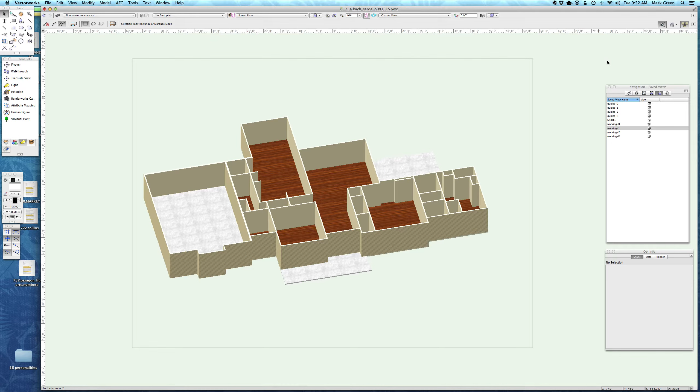So that's what I'm going to show you on this. So this is how we left the last one. We're back to a plan view. I'm going to turn off the guides because you won't need them. So this is a little bit advanced.

We're going to be using that wall replacement tool, and we're basically going to be duplicating the exterior walls of the first floor, moving the duplicated version to the basement level, or the foundation level I should say, and then we're going to replace those exterior walls because they're just made out of 2x4 right now. We're going to replace them with a different thickness of concrete wall.

We're going to have to change the classes too because we don't want to have a concrete wall that's in a siding class. That would be incorrect. So first I'm going to select all of the exterior walls. To do that, I'm going to get this magic wand, this select similar tool. I got to make sure I'm selecting what I want to select here, so I got to click on this, the preferences here. And I'm only dealing with classes right now, so thickness doesn't matter. It's actually set exactly the way I want it.

Because I want to get everything that's in the same class. See, if I left it selected like this, it would be looking for all of the same wall styles. And you remember some of these exterior walls were with the exterior 2x4 wall style, and some were 2x6. So those would be a couple different wall styles. So right now, because it's selected, it's looking for all the same wall style.

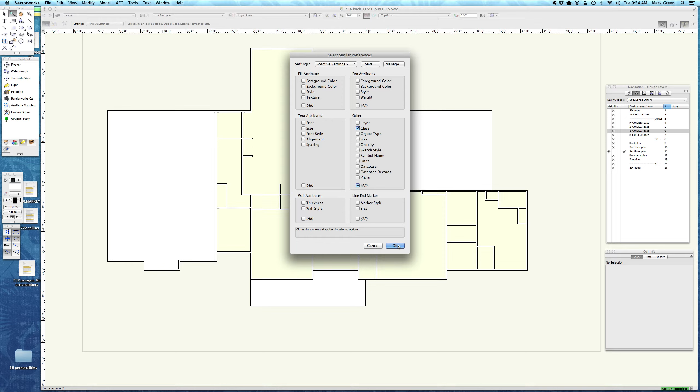The class, they are all in the exterior siding class, so that was correct. So if I turn this off, now it's looking for all, whatever I select with my magic wand select similar tool, it's going to look for everything that's in the exact same class of whatever I touch. So I'm going to just leave it like this. And if I click on this exterior wall, it should give me the entire perimeter of the house, and also include that garage separator wall because all of those walls are in the exterior. I think they're all in the exterior siding class. They are.

So technically, I'm going to deselect those. Technically, this wall shouldn't be exterior siding because it's not really an exterior wall. It's not going to have siding on it. It's between the garage and the house, so it's really an interior wall. So I'm going to change the class on that because it is an interior wall.

Okay, so now I'm going to get that again. I know that the preferences are already set the way I want them. So this should now select just all of the exterior walls, and it does. I do, however, also want to select this wall. I just want to make sure it was in the right class. So I'm going to hit the selection tool. All of those walls are still selected. I'm going to hit the shift key because I want to add this wall to it.

All right, so those are the walls that I want to take downstairs for duplicating. So all these walls are selected. I'm going to hit Command D.

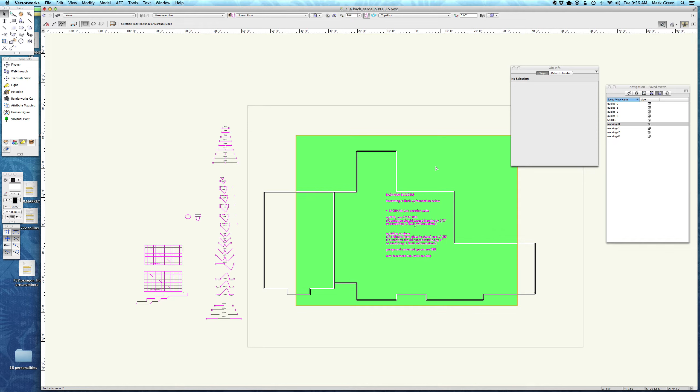This note is important, so I'll just slide it off to the left here. So there's all the duplicated walls. The one thing it does is it screws up all of the connections, all the joins. So we'll change that at the end.

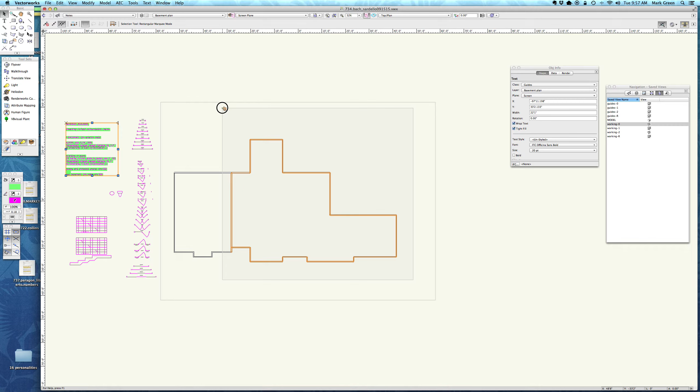Let's see, what I want to do first is we'll deal just with these - these are the walls that will have... So you remember I said that the basement of the house is kind of separate from the garage, the foundation of the garage, because the garage doesn't have a full basement.

So if you were literally standing inside this basement right now, which are the walls that are the perimeter of the basement? Let me draw a thing around them. It's almost all those walls minus this wall right here. So that would be the entire basement of the house.

So I'm going to replace all those walls with a 10-inch concrete wall, and then make sure that they're all in the right class.

Currently, if you look under class, there's nothing showing - it's because there's more than one class. All of these walls are in the exterior siding, and this separator wall is in the interior. Remember, we just changed that to the interior class. So that doesn't matter right now because they're all going to become concrete as soon as we change them.

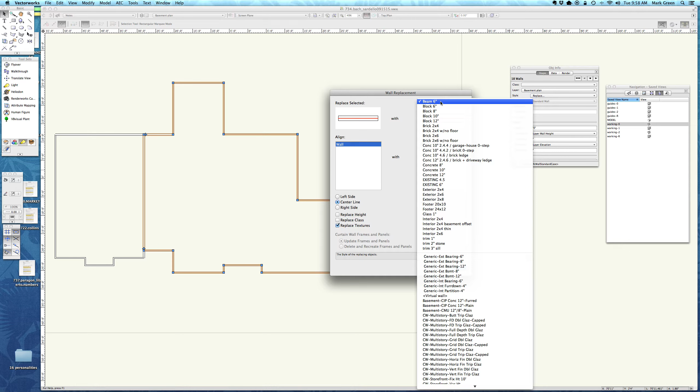So these are all going in a clockwise fashion. We're going to replace the left side of the existing wall with the left side of the new wall. I'm not going block 10 inches, I'm going concrete 10 inches. Align left side with left side. All these walls are going to grow toward the inside of the house because the outside is aligned left with left. So watch the walls as I hit OK.

So they all grew in. I just need to change the class now to wall exterior concrete. Now they're all in the correct position.

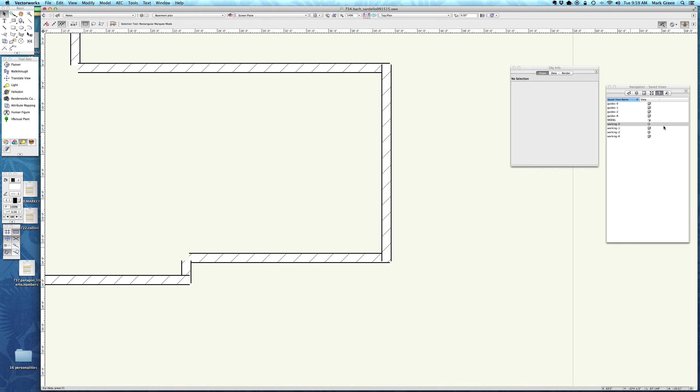So the only other thing about those walls right now is they have to be aligned properly with the ones above. So currently I'm going to zoom into this part of the house and turn off the guides layer - there aren't any guides on, but I'm going to turn those off - and ghost the first floor plan above.

So you can see that the walls are lined out to out all the way around. That's because we aligned those left to left. Hope all that makes sense. So these still aren't joined - we're going to have to join those in a little bit.

But the last thing that I want to show you is that these foundation walls actually need to be bumped out a half inch, because when the builder frames these 2x4 exterior walls, he's going to put a half inch of plywood.

It's actually called OSB, and it's actually not a half inch, it's 7/16, which is very close to a half inch. So he's going to be putting this 7/16 OSB sheathing on the outside of the 2x4 framing, and that sheathing has to be flush with the concrete wall. So that's actually what this note was about over here.

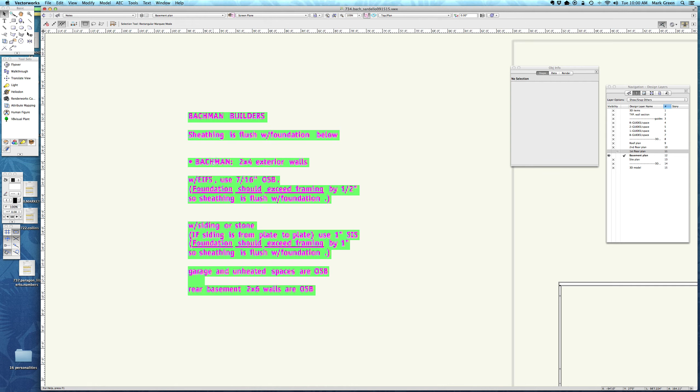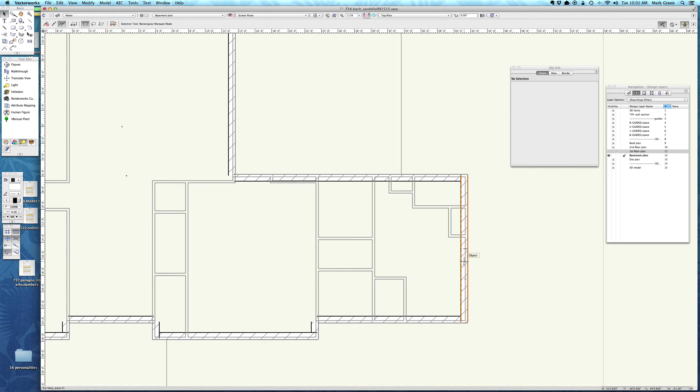So anyway, that's—actually I just told you wrong. There's going to be a 1-inch sheathing. If it's a 2x4 exterior wall, it's going to be 1-inch sheathing. So in order for the sheathing to be flush with the exterior wall, all of these concrete walls have to be bumped out 1 inch.

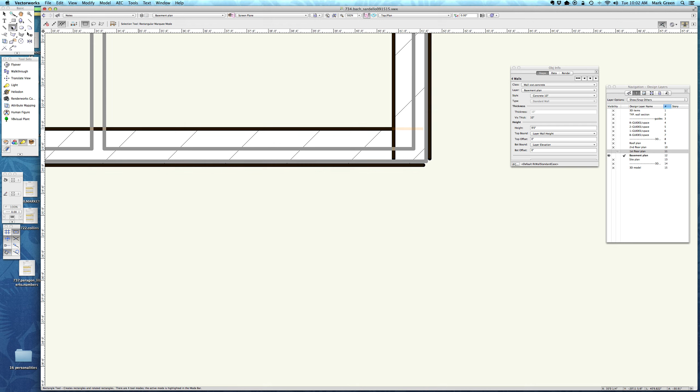So if I select this, this, and this, I can bump all of those walls down 1 inch and over to the right 1 inch, using Command M to get the move selection dialog. Those 1, 2, 3, 4 walls are going to move over 1 inch and down 1 inch. If I zoom in you can see they're outside by 1 inch—let me draw a box here to show you. There's 1 inch. So I basically have to move all the other ones too.

Let's go up here—this one needs to be moved, this one needs to move. I'm selecting these because I can move all these at the same time. I could select this one and move it up 1 inch, then select this one and Command M it over 1 inch, but I'm just going to undo those, because if I move all of these at once, I can, since they're all going either up or over.

So Command M, 1 over, 1 up. This one, this one, this one—move it over, move it up. And then this one, this one, this one—move it over, move it down. And then this one also moves over and down, and these ones move over and down to the right. All right, so they've all basically been moved 1 inch away from the walls above.

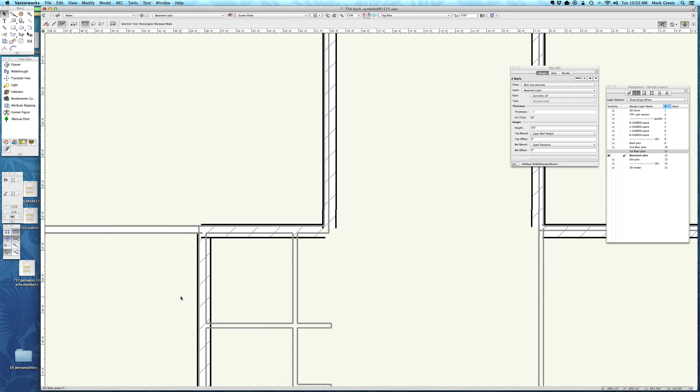Okay, now I'm just going to turn off that ghosting, and I'm going to repair all of those joins. If you click anywhere on the first wall to anywhere on the second wall, it'll join properly. Okay, so those are all joined. I'm going to go ahead and ghost that first floor over top of it again.

And you can see that the basement walls are 1 inch out from the framing above. And again, that's because the framing above is going to have, in this case I said OSB before, but actually it'll be 1 inch of foam, and that foam needs to be flush with the outside of the concrete below.

So now all we've got to do is put a foundation under the garage. And if you recall, these are the garage-only walls. I can select them all holding down the shift key individually like this, or I can just draw a marquee around them all and then hit shift to deselect this one, since I don't want that one.

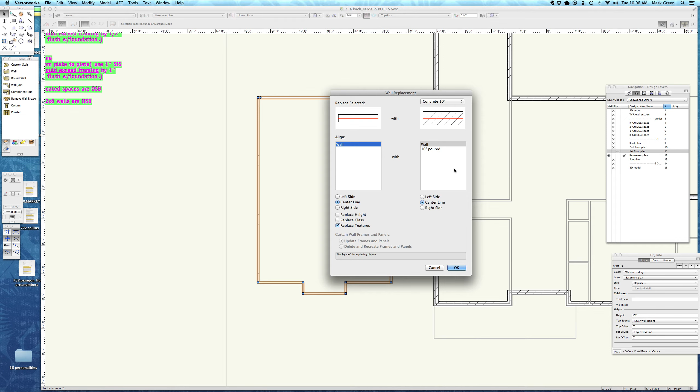All right, I'm going to be doing the same thing with this—aligning the right side of the wall with the right side of the new wall. Initially I'm going to make these all 10-inch concrete, then change the class. Okay, that's the first step. Second step would be to move them all 1 inch.

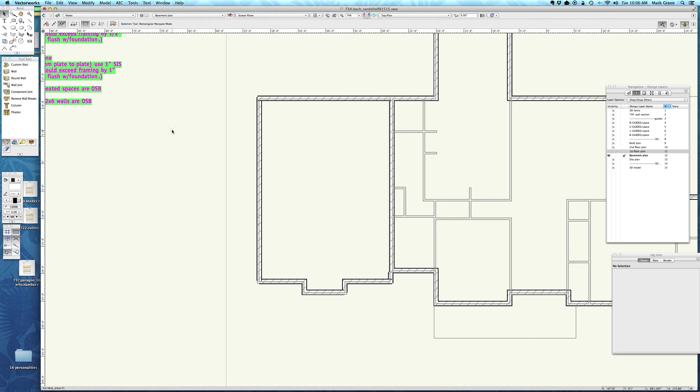Next step would be to join them all properly. Actually, the next step would be this garage—the wall that has the garage doors on. This is the only one that's ever a 12-inch concrete wall, and the extra 2 inches are to support the concrete driveway, so the driveway isn't just resting on dirt, it's resting on part of the house. The extra 2 inches provide a ledge for that concrete to be poured and rest on top of.

So I'm going to replace this 10-inch concrete with a 12-inch concrete wall, but I'm going to align the right side of the existing to the right side of the new, because I want it to grow 2 inches further on this side, on the left side.

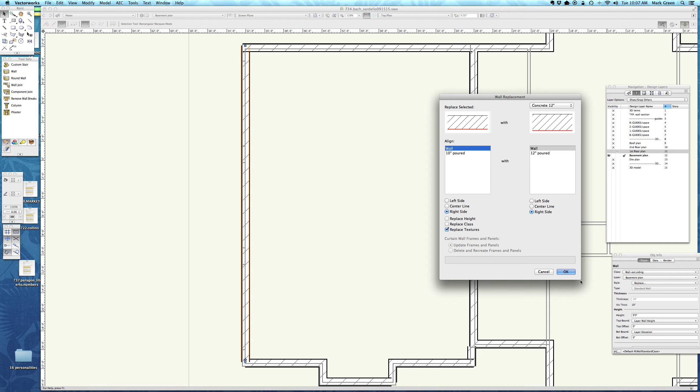So line right side with right side, and that's that. All right, so the only other thing to do would be to align this 10-inch wall with this 10-inch wall.

Just like the concrete has to have that 2-inch ledge to rest on for the concrete driveway to rest on, the inside edge of the garage also has to have a ledge to rest on. Remember we drew the concrete to the inside of the framing? Well, it's resting on all of this extra concrete block. Right here you can see it's got 3.5 inches to rest on, but here it only has 1 inch to rest on.

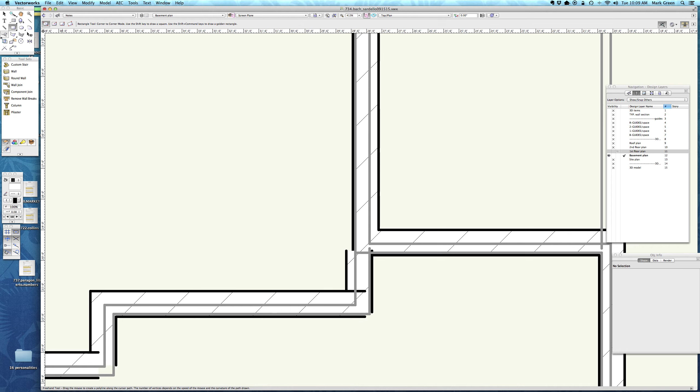Plus, if you were actually putting up forms to build this concrete wall, this would be a real hassle to have this little jog here. So I'm just going to align this wall with this wall, and the difference is it's off by 2.5 inches. I'm literally just going to select this wall, Command M, move it over 2.5 inches, and now they're aligned.

So all we got to do now is turn off the first floor ghosted, and I'm just going to reconnect all these. When I'm connecting these, just remember, just like above when the garage walls were done last, first make sure that this one is connected properly to this, and that this one is connected properly to this one, and then connect the garage walls to it.

And one way you can tell is whether or not they're properly aligned. If you click on this, you can see that ghosted orange goes all the way over to the corner, and the same with that. So they're definitely connected.

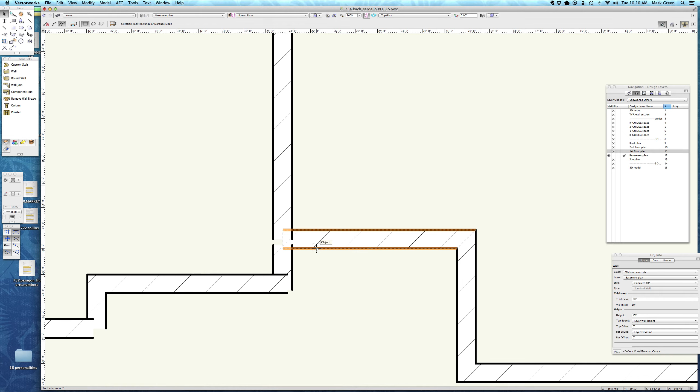I'm going to disconnect them real quick by taking this remove wall breaks. And now if I select, you can see that the ghosted orange only goes halfway. Okay, so I'm going to reconnect those.

I'm going to do these corners of the garage. Those are connected. Connect this to this. Those already are, I can tell. Connect that to that. Connect this to that. All right, those are the garage foundation walls.

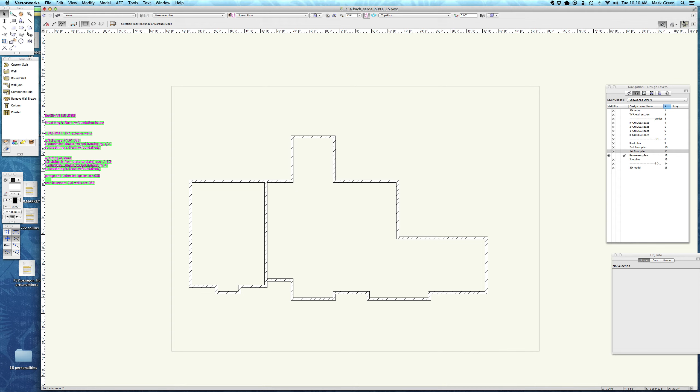Now currently those are all full height, the exact same height. And remember, I said the garage foundation walls are usually only 3 foot high, less than half the height of the main foundation walls. So what I'm going to do is select those walls.

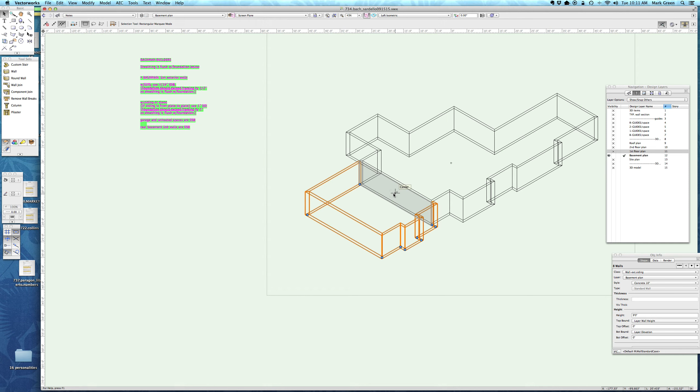Okay, so just these walls are the ones that are going to be shorter. Look at it in front view. If I go down here, the bottom offset, I want those to be 3 foot high. Currently they're 9 feet high. I want them to only be 3 foot high. So I'm going to bring the bottom up 6 feet. And now those are only 3 foot high walls.

So if you look at them like that, I see a mistake there. I didn't change the class on those, so let me reselect those. See, those are all on the wall siding class. I'll put them all on the wall exterior concrete class. Now redo that - now they're in the correct class.

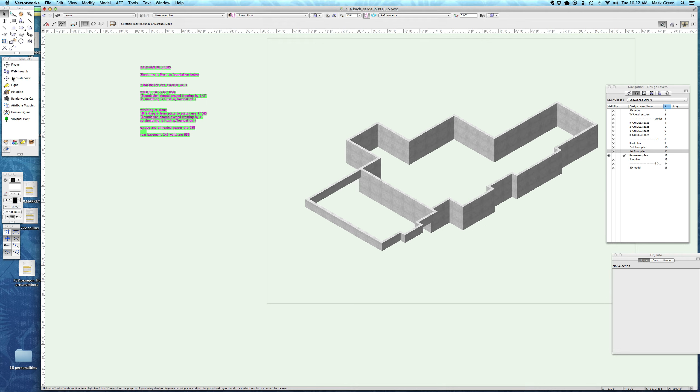So this is what this looks like. Those walls are 3 foot high, and the rest of them are 9 foot tall. So for the foundation, there's one last thing that we need to do.

Underneath all of these walls is going to be a footer, which is basically a wider concrete wall. That wider concrete wall is only 10 inches thick - usually sometimes it's 12 inches, but it's almost always 10 inches thick. It's going to be 10 inches thick, and it's wider. It's a different wall style.

So we're just going to do the same thing. We're going to select all these walls, except for this one - those are all the basement walls. I'm going to Command D to duplicate them, and so now I just have the duplicated walls on top of the other one.

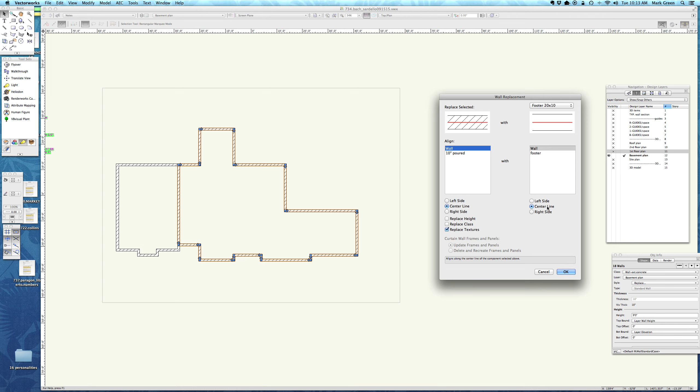So I'm going to change the wall style to a footer - 20 inches wide by 10 inches deep. So footer 20 by 10. I'm going to hit OK. I'm replacing the center line to the center line because I want the foundation wall sitting directly in the center of the footer walls.

Okay, currently it's in the exterior concrete class. I want those to be in the footer class - exterior footers. And I want to send them to back, Command B.

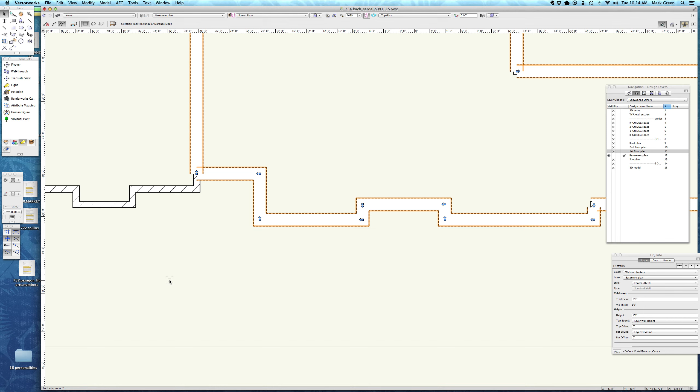Now they look correct, except for the fact that these are all 9 foot high, and they're not supposed to be 9 foot high - they're only supposed to be 10 inches high. And they're supposed to sit underneath. I'll show you a front view - they're supposed to sit underneath those 9 foot high concrete walls.

So I'm going to do bottom offset. They need to go down negative 10 inches. And the height isn't supposed to be 9 foot 10 - it's only supposed to be 10 inches. So that's how they're supposed to look.

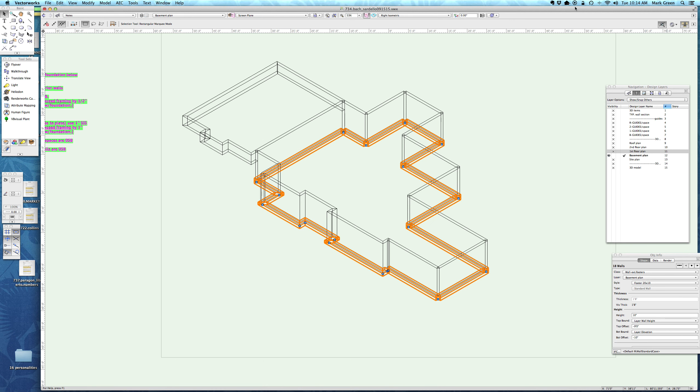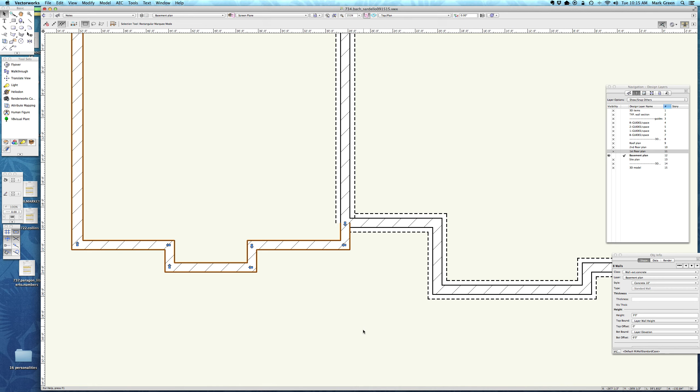Okay, with the exception that I gotta work on these joins again. The last thing is doing the footer wall underneath these garage walls. So I'm gonna select all these walls, deselect this one and this one, so just the garage foundation is selected.

I'm gonna hit Command D. I'm going to replace center on center with the footer 20 inch. I'm going to change the class to footer.

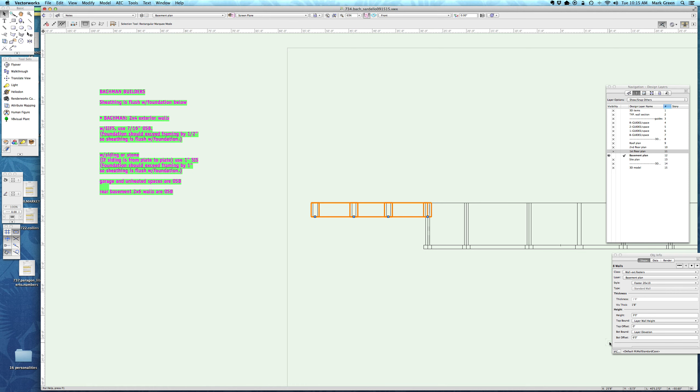And then I'm going to look at it in the front. You don't have to do this, I'm just showing you for your benefit. These are currently 3 foot tall, so I got to take 10 inches off of here, which should mean 3'2". And then instead of 3'10", just going to make them 10 inches. And that's correct.

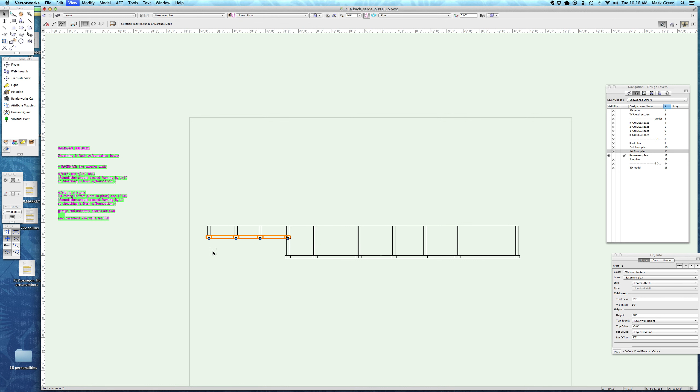This is what it looks like when it's done. Actually, let's connect all those walls. Let's send those to back. Those are currently in the front, so let's Command B to send those to the back. And just get the wall join tool.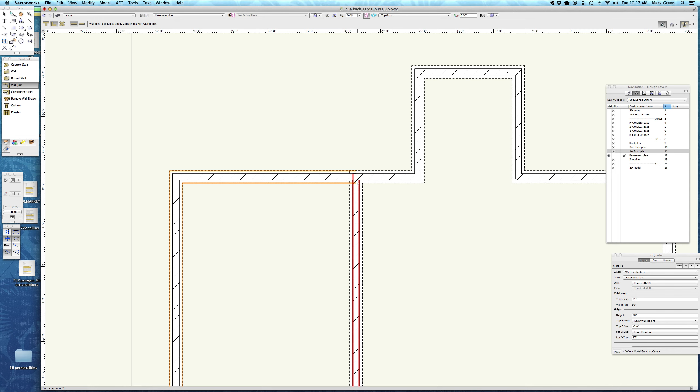Okay, everything looks... this looks wrong. I can tell that that goes to the corner, so it's just this one that needs reconnected.

There's a situation where sometimes it won't let you do it, so I'm just going to remove all the wall breaks as simplified, and I'm going to rejoin the ones that need rejoined. So those need rejoined, these need rejoined, and this needs rejoined.

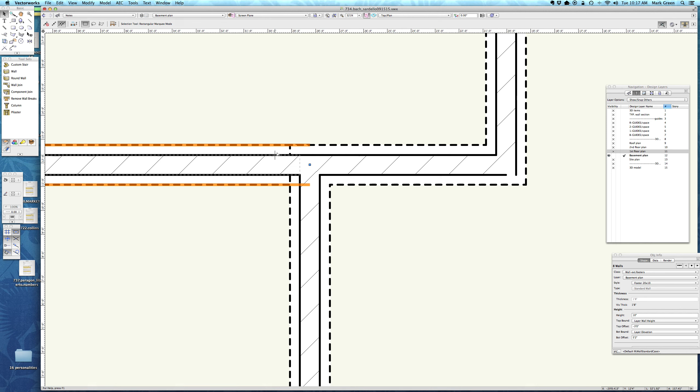See that this one over here needs rejoined. Check them again, this one somehow came undone. See how this, I did this one and now this one's undone. Sometimes you chase these around the edge and I don't know why that happens. So just double check that all the corners are correct.

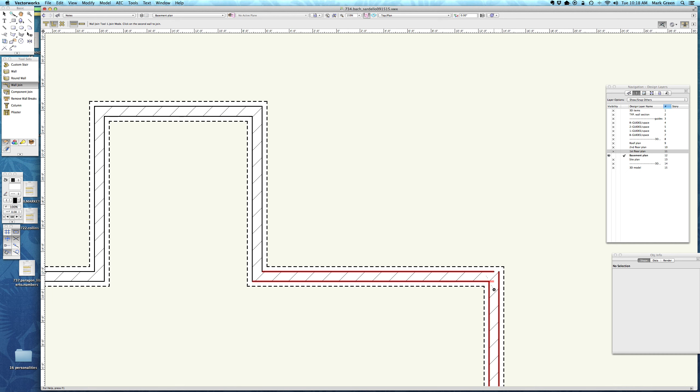It's going to go around the entire building now, watch. See this one down here that's connected, it's going to become unconnected as soon as I do this one. Oh, made me a liar. Alright, this one needs redone now.

Oh, my nerves, I don't know why this happens. If something screwy happens, just undo. Kind of glad that this is happening because there's no rhyme or reason as to why this would all go wrong. I'm going to remove all the wall breaks from here and just reconnect this whole thing. So connect that to that, connect that to that, connect this to this, this to this, and then this to this. So that's correct.

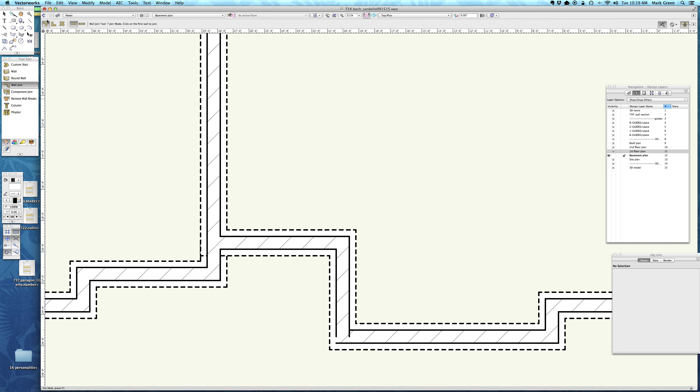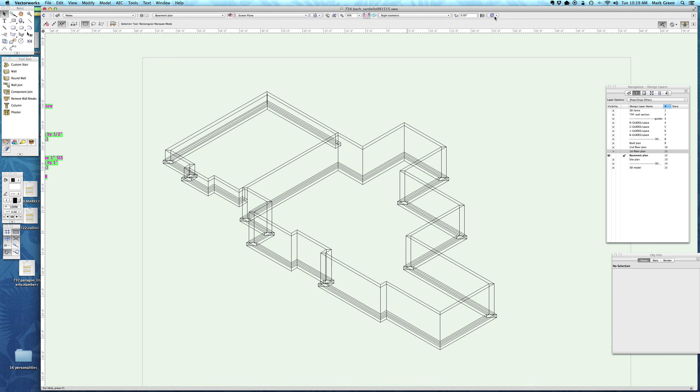See what happens with this one now. All right, now looking at every corner, they all look correct. So zoom out, put it on isometric just for you, render it, and that's the way it should look.

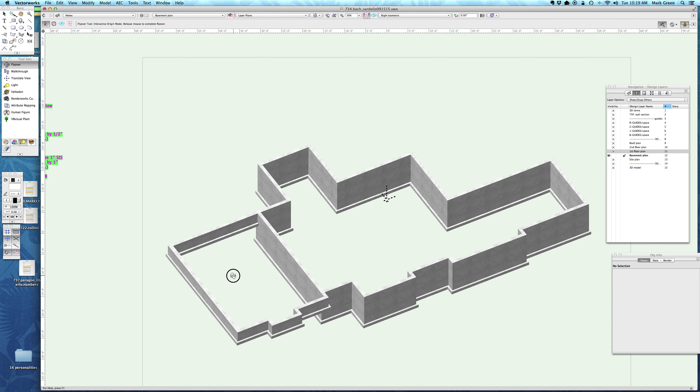And if you truly want to do one last thing, you could put a concrete floor in this basement, and an easy way to do that would be to select all of these exterior walls of the basement. Actually, you just want the walls, you don't want the foundation, so just select all these.

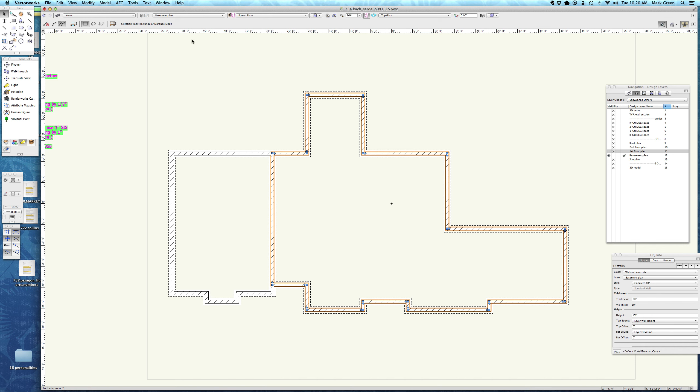You could either draw a polygon to the inside of all these walls, or if you just select all those, you can create a polygon from walls. Not doing the gross area, you're doing the net area, that's the inside of the walls. Boom, got yourself a polygon.

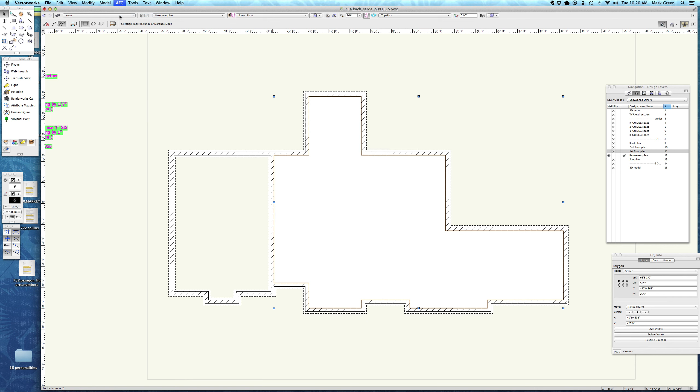Create a floor out of it. It's not going to be -4, I think it's just going to be 0 plus 4. You can look at it.

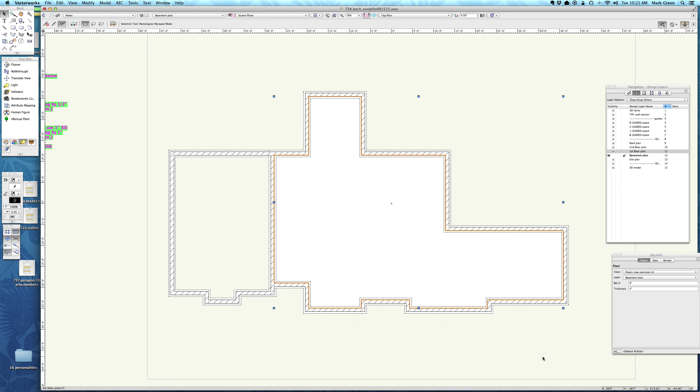First, change the class to floors. This would be new concrete interior. I'm going to send it to the back just visually. Look at it in front view, and it's where it should be. It should be resting on top of these footers. And there's your concrete floor.

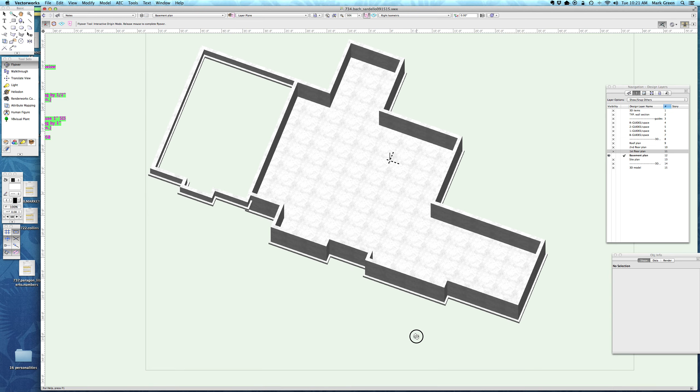And that's it, it's a very long, very complicated, I would call that a pretty advanced lesson. So if you can do everything that I just showed you in all 4 of these videos, that would be amazing.